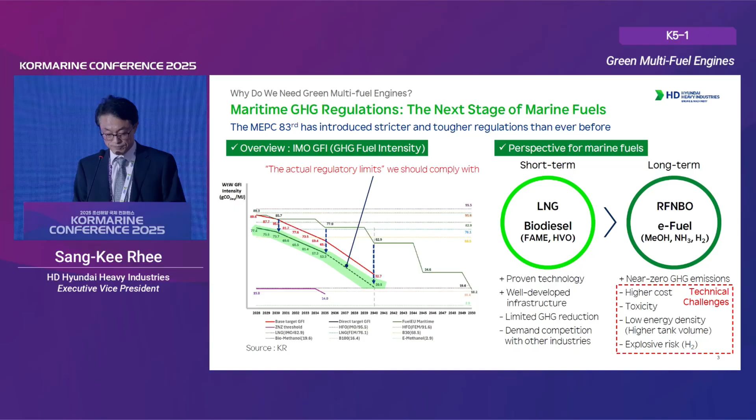If you look at the potential future fuels, there are biodiesel, e-diesel, LNG, methanol, ammonia, hydrogen, and etc. Biodiesel or e-diesel has the advantage of being able to be used immediately without any modifications, but it has the disadvantage of possible conflict with the aviation business sector.

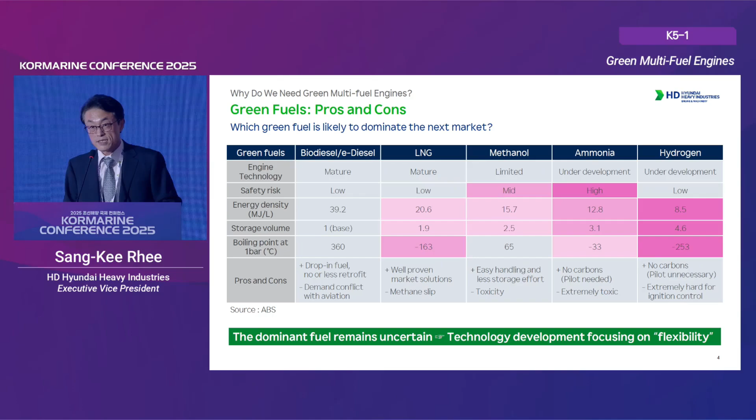Methanol is a liquid at ambient pressure and temperature, so handling is very easy and there is less loss during storage, but it is toxic. Ammonia has a good advantage with no carbon, but is extremely toxic. Hydrogen is also a carbon-free fuel, just pure hydrogen, but ignition control is extremely hard.

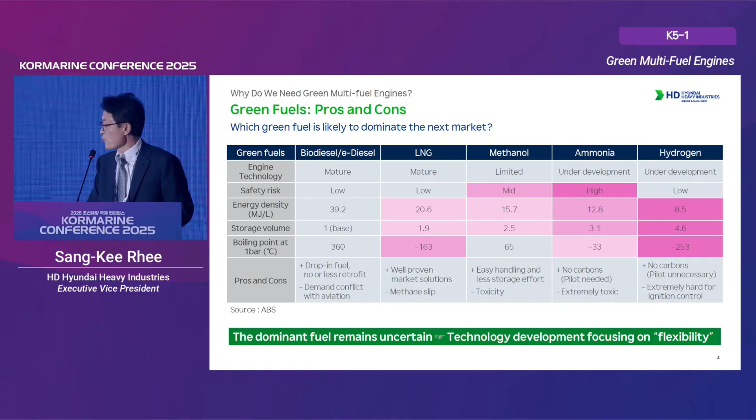No matter what the fuel is, using the same platform is the most effective, efficient way to respond to market uncertainties. We keep the structure and driving parts the same as the diesel engines, and only the upper part, especially the alternative fuel supply, cylinder head, piston, and combustion components, is changed according to the fuel used.

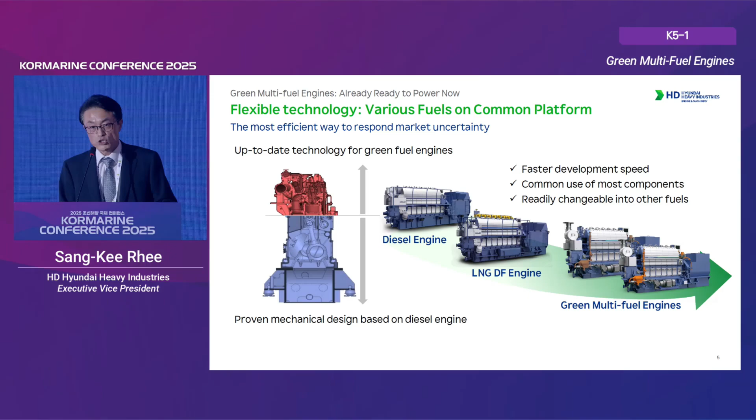Therefore, this kind of philosophy is good for faster development speed, and many components can be used for both diesel and alternative fuels. It is also a benefit for retrofits from diesel to any other alternative fuel. Now I show the LNG DF engines, methanol DF engines, ammonia DF engine, LNG and hydrogen, and full hydrogen engines.

Each one has its own characteristics. LNG DF is already proven in the field, with extensive production experience, and is well settled in marine, inland, and generation plants. Methanol and ammonia are based on the diesel engine platform, with their own components for the fuel injection and supply system, and a proper combustion chamber shape.

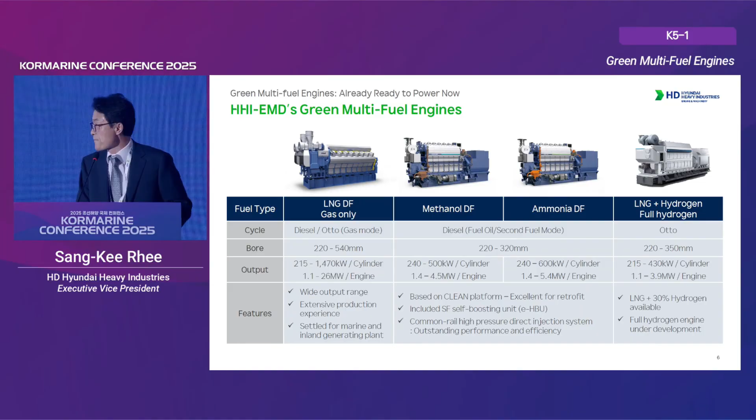Also, we are choosing a common rail system for fuel supply and injection to get the most reliable combustion performance. LNG and hydrogen mixed fuel combustion technology is already proven, and we reached almost 30% hydrogen energy fraction. And now we are developing full hydrogen engines.

So what makes the green multi-fuel engine different from conventional diesel engines? I'd like to point out first the common rail system for alternative fuels. We can get high efficiency and also ensure safety.

Second thing is the boosting unit. It is a patented design. The merit and advantage of this design is that the ship design part only needs a lower pressure supply system to the engine side, and then lower pressure alternative fuels can be increased, pressurized to the proper injection pressure into the combustion chambers.

And third thing is EFIPs. Its design is based on the conventional fuel injection pump types, but it is controlled by an electrical control system, and we can adjust the injection time and injection volumes for each load. And fourth is hybrid injectors. This injector is designed to use the primary fuels and the secondary fuels at the same time.

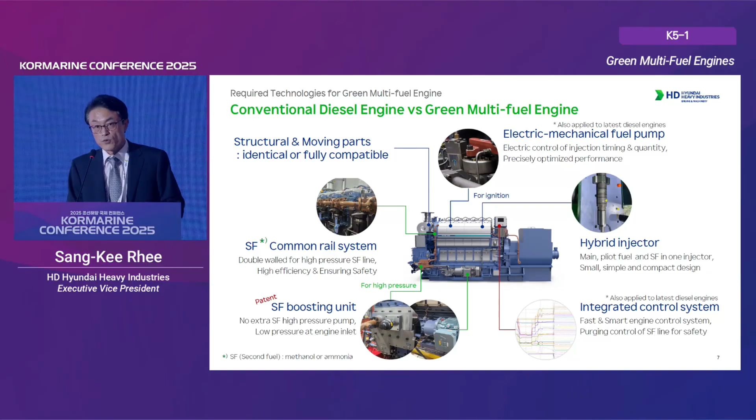And next, a very important thing is the integrated engine control system for each alternative fuel. I'd like to compare between the Otto cycle and diesel cycle. I think you already have enough knowledge, even so I'd like to point out: the Otto cycle has a lot of pros regarding its very simple configuration. But we are facing knocking sensitivities, so therefore we have engine output limitations.

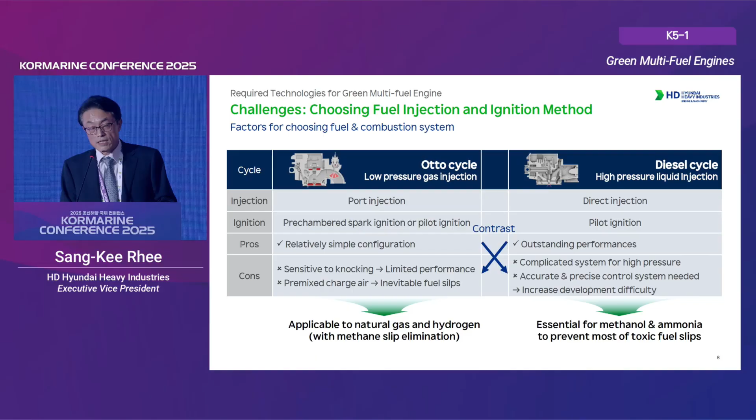In case of diesel cycle, we can keep almost the same rate as diesel, but it is a little complicated system, and also we need a more accurate engine control system. Therefore, we chose the Otto cycle for LNG and hydrogen, and the diesel cycle is selected for methanol and ammonia. In case of ammonia, we cannot easily control the nitrous oxide. It has a very high greenhouse gas potential index. So this alternative fuel needs an absolutely accurate engine control system with very sensitive sensing and also control.

This control system is called HiCORE. It consists of 5 modules. One is the main control panel for main engines and the safety control. And local operating panels are the user interface between the machine and operators. Auxiliary control panels: some auxiliary systems are needed for proper operation with alternative fuels.

And the injection control modules: normal diesel keeps its injection timing and injection volume for each load. But in the alternative fuel case, you can adjust its timing and duration. At the same time, we can control the pilot oil injection and also volumes. And next is cylinder monitoring modules. It is a good interface with the fuel house and engine local control panels.

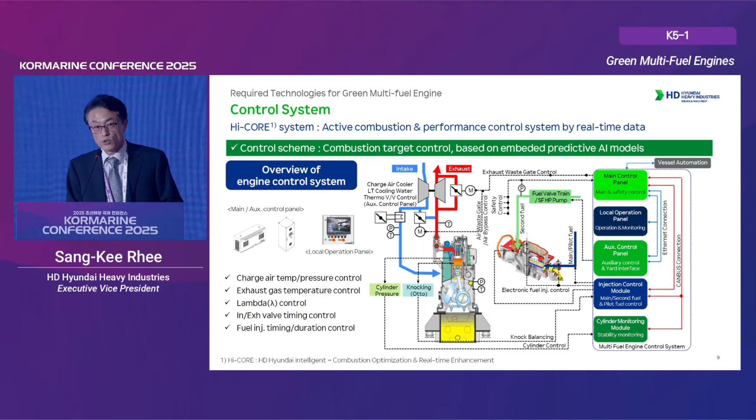These 5 modules can control the charge air temperature to get the proper lambda ratio. And at the same time, we can control the exhaust gas bypass volume or the gas volume into turbochargers. And the variable valve timing assists the operator to adjust intake and exhaust valve open and close. At the same time, we concentrated on designing a safety system for these alternative fuels.

As I've mentioned before, these alternative fuels have very toxic characteristics. So we can divide it into two systems. One is the structural sealing concept. We can adapt the sealing material for each alternative fuel. And for all piping systems with any possibility of exposure to human beings, we adapt a double wall piping system. The other is the sealing oil system to protect against any leakage of alternative fuels from any component.

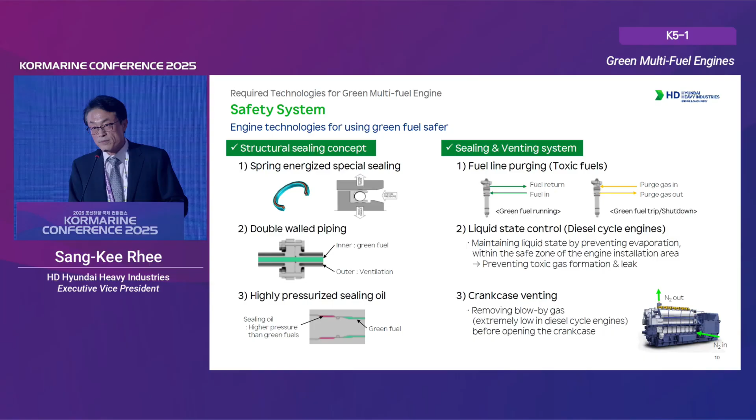And in case of ammonia, it easily changes from liquid phase to gaseous phase. In order to prevent the gaseous phase change, we adapted some backup pressure just before the supply piping line. And also we can control the crankcase pressure and temperature to minimize any leakage through the crankcase chambers.

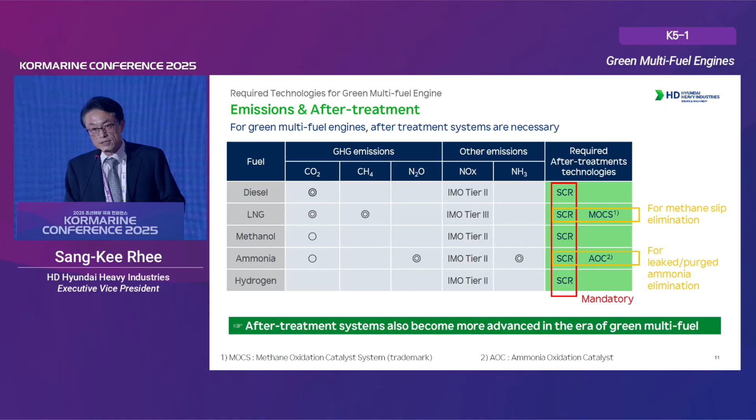How to control the exhaust gas emissions? Various fuels can be used on the engine, and each fuel has its own characteristics. But the SCR can control NOx from any fuel, MOCS can control methane slip emissions, and AOC controls ammonia emissions. But until now, based on test and experience with ammonia operation, AOC is not required because some ammonia slip volume can react with the NOx through the SCR.

And in summary, I'd like to point it out on these tables. All technologies for eco-friendly engines are already in place. The remaining things are well-defined regulations, robust fuel supply infrastructure, and decisive leadership of shipping companies, ship owners, and shipyards.